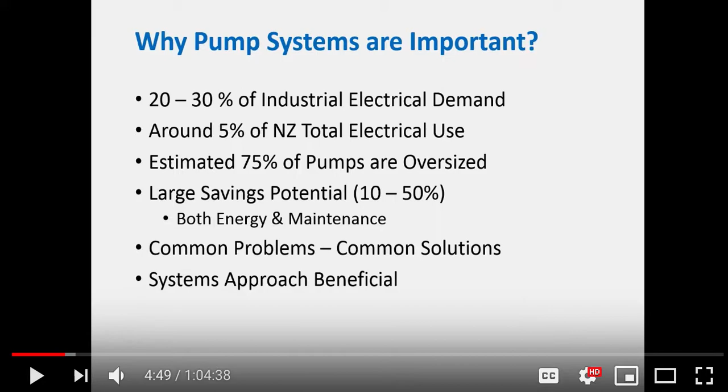To reinforce the point, this is a good study from Finland across multiple industries that evaluated 1690 pump systems across 20 sites. Average pump efficiency was less than 40%, with 10% of pumps less than 10%, and average motor efficiency was 81%. Major factors that affected pump performance included oversized pumps, throttled valves, and seal leakage, which led to the highest downtime cost.

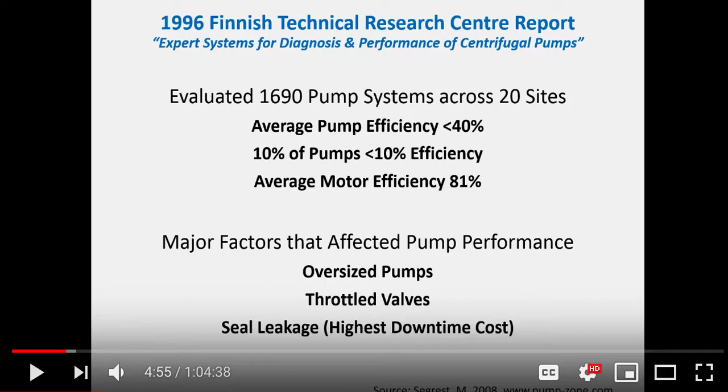Pump and system—this won't be teaching you how to suck eggs, but it's important to review what a pump curve is and the information we may find from a vendor when we look up and look for a pump. So here is a pump curve for the pump shown on the right.

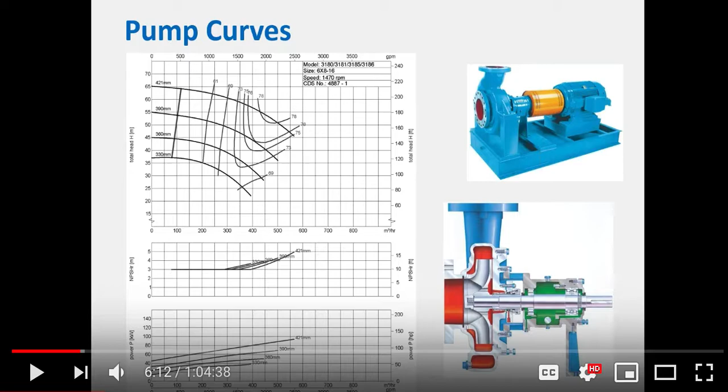If we just look at the pump curve, it basically expresses the performance of the pump—how much flow rate the pump will generate at a given head, or a given pressure drop that it has to deliver.

The four curves shown there are for four different impeller sizes. It's very common to have a casing size and then have different impeller sizes available for that casing.

Each one of those curved lines shows you the performance of each impeller size. More recently, with new pump selection packages online, you put in your requirement and it will give you a specific impeller diameter—these can be machined down, and the supplier will produce one to that given specification.

These other lines that cross our lines are lines of constant pump efficiency, and we can use those to estimate what the pump efficiency will be at a given point. Obviously there is a point on the pump curve where the efficiency is at a maximum.

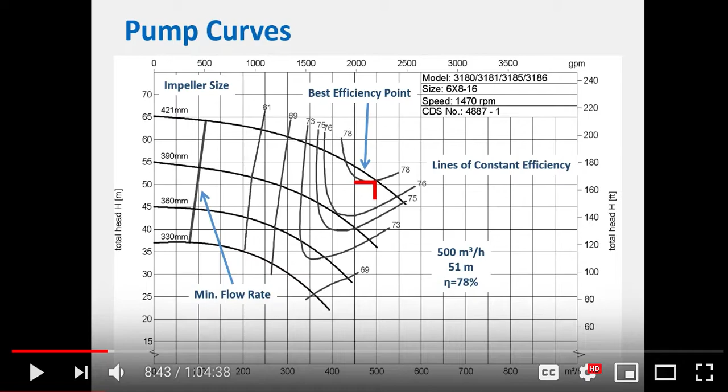If we have a given requirement, say for a certain flow rate, we can look at what head the pump will produce at that flow rate, or vice versa. So you may know what the pressure drop will be, and we're interested in what the flow rate will be at that certain point, and then we also have the pump efficiency, so we can calculate the power requirement as well.

Sometimes they're all on the one page, but I just split them up.

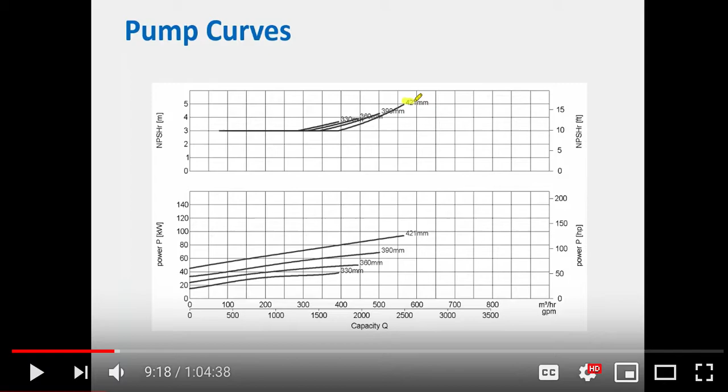There will be a net positive suction head required, some information on that given for the pump, and in this case it's done away from the pump curve proper. So here we have the NPSH required for the pump for different impeller diameters. That's important information to have, because we also need to make sure our system has a margin so that it will have more net positive suction head available than is required by the pump. Otherwise, we're going to run into cavitation issues, as well as power consumption issues at a given operating point.

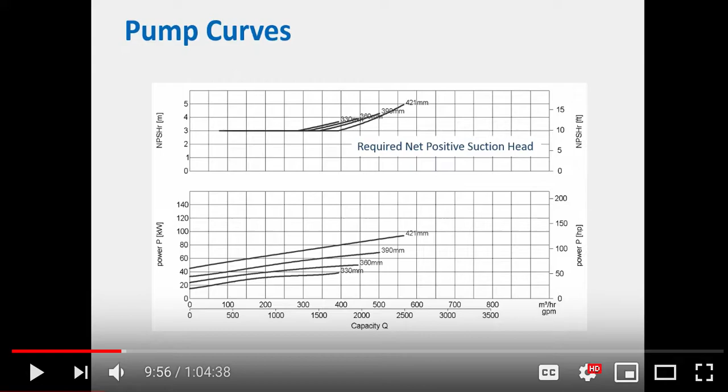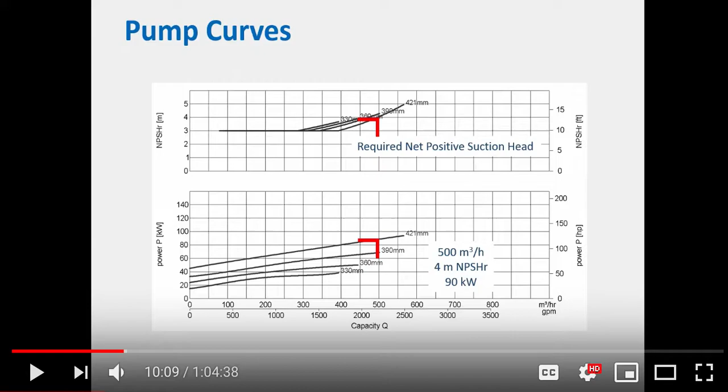So these are the net positive suction head required curves, and for a given operating point we can determine the required NPSH, as well as the power consumption of that pump at that operating point, for different impeller sizes. Or if you actually specify an impeller size and are interested in variable speed operation, for example...

It's also useful to know that if that's not provided, there are some approximations that can be made using the affinity laws.

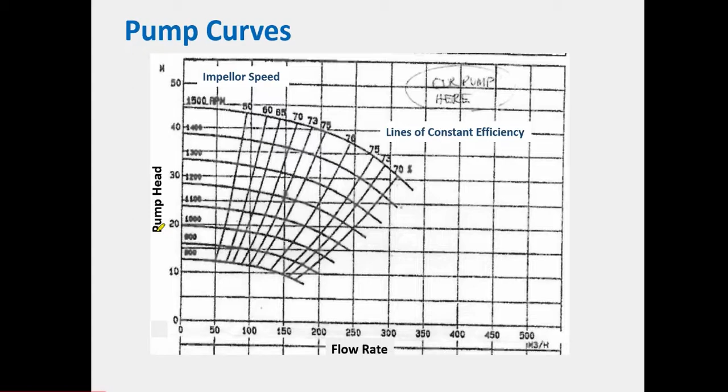Now, we talked about this in previous webinars, but it's useful to reinforce this point: ideally pumps are designed to operate within a very narrow range continuously. They can be operated outside of that preferred operating range intermittently, but there will be some energy performance and some reliability consequences.

If you're planning to operate outside of that preferred operating range for a long period of time, then it's not the right pump. The flow rate at the best efficiency point is important to know, and there's an allowable operating range outside of that, but that's really only for short-term operation, okay?

So we have talked about it.

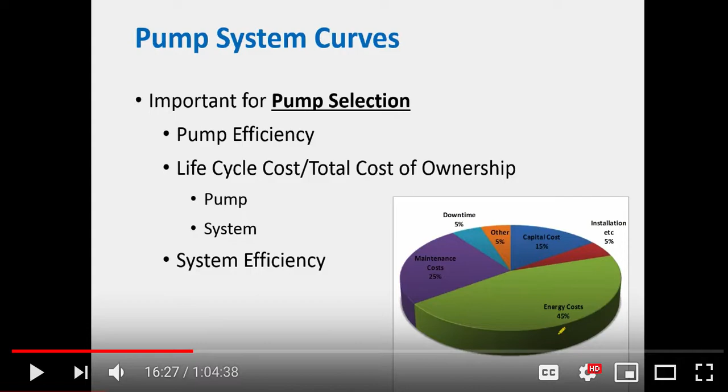There'll be entrances and exits to process equipment. There will be valves. There may be changes in pipe diameter, which will then have an effect on the pressure drop as well, so we need to understand our pump system.

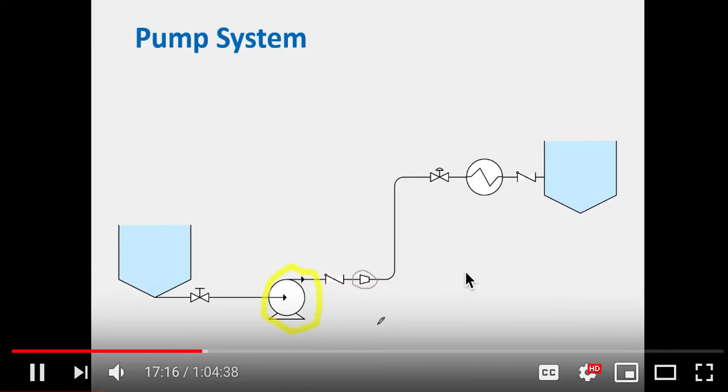And so from that we can generate our system curve, okay, and that system curve essentially describes the pressure drop as a function of flow rate for that particular system.

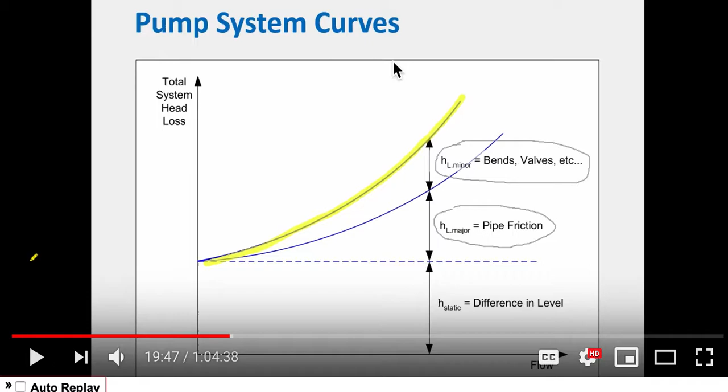If you're doing a design of a system to estimate what that will be, there's some software that can help you do this, or you can do it empirically by hand. There are some different methods, and we will in the future look in more detail at how we generate a pump system curve so we can estimate pressure loss versus flow rate, empirically.

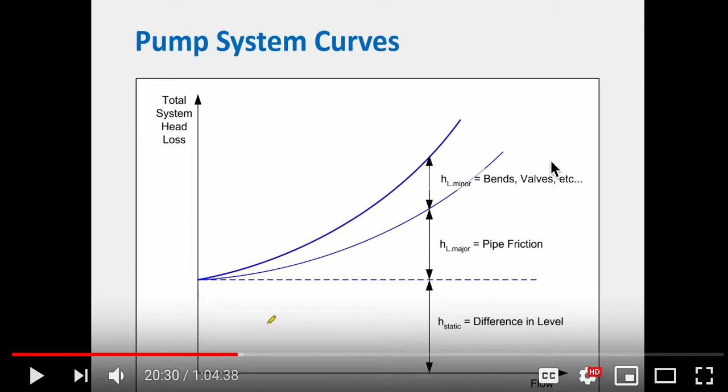Just a reminder, our operating point of our pump will always be where a pump curve and a system curve intersect. You can't get around that.

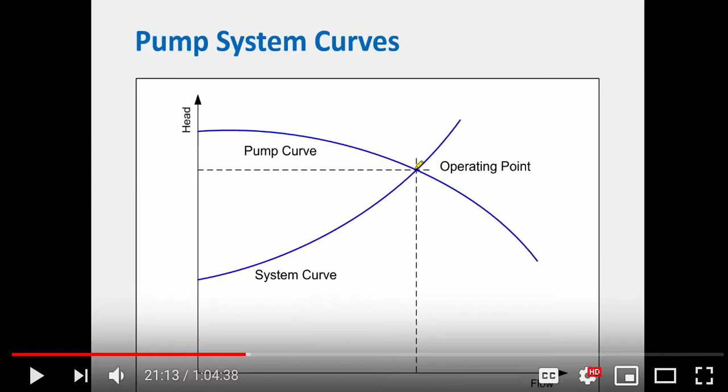With our system curve, if we want to size our pump, what we're trying to do is make the operating point at the desired flow rate or head at the best efficiency point of the pump. If there are any changes in our system, we want to be able to look at that in our pump curve. So we'll spend a few minutes talking about what we need to specify in order to select a suitable pump, and then to size it correctly.

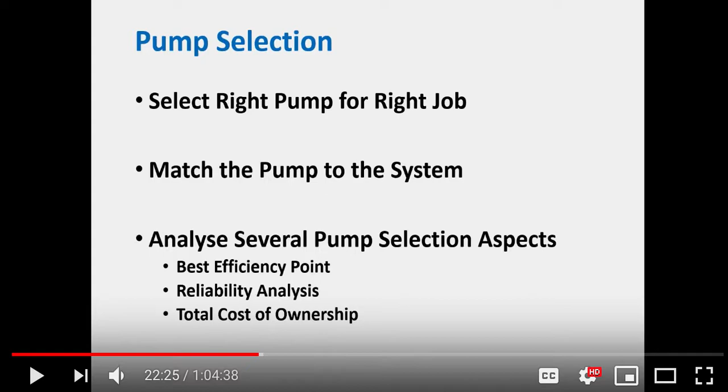Match the pump to the system, analyze several pump selections, best efficiency point, total cost of ownership, reliability analysis. System performance requirement, hydraulic requirement, pump characteristic.

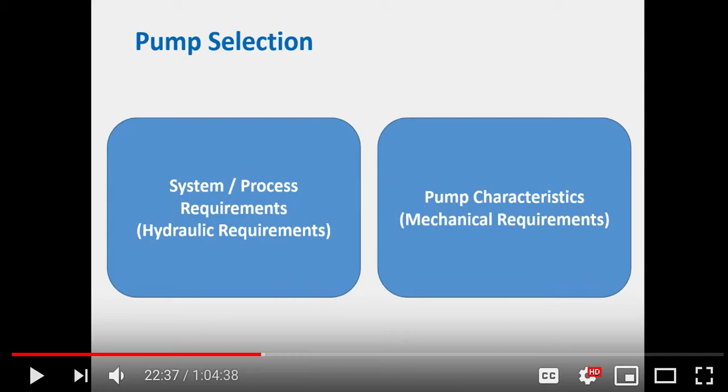Pump selection hydraulic aspects: system flow rate, static head, total dynamic head, net positive suction head, suction pressure, minimum flow rate, total working pressure, service hours, control method, liquid temperature, vapor pressure, viscosity, solid size, content, density, and other characteristics.

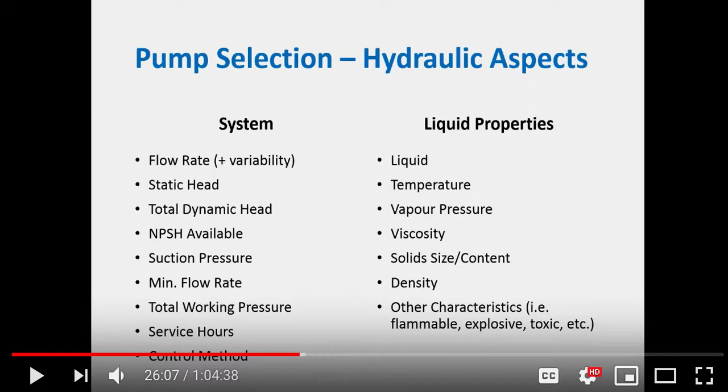A lot of our motors operate at around 1500 RPM, but we may want to go to a higher speed pump. That's an important choice to take a look at.

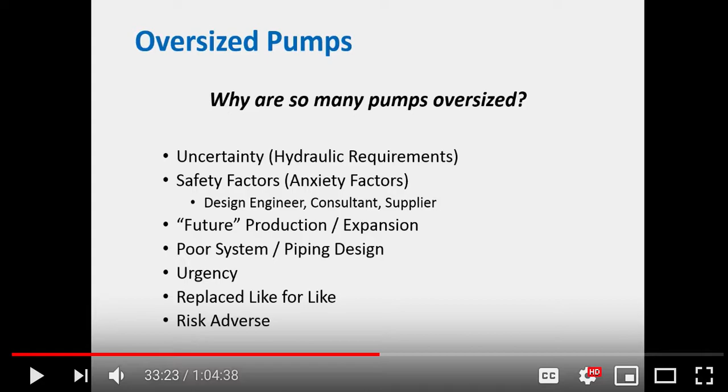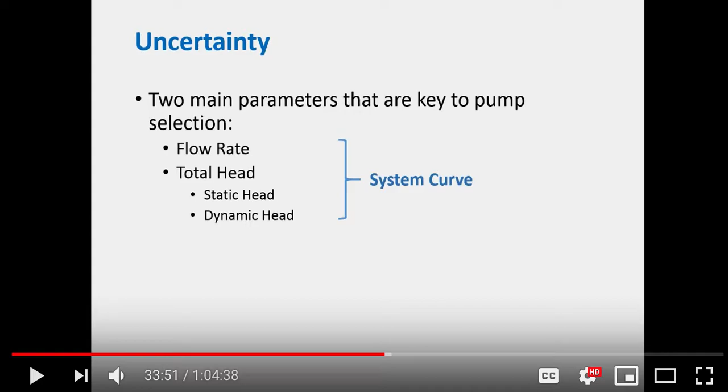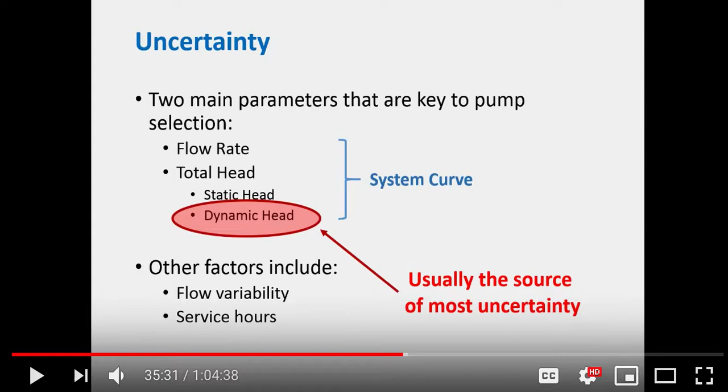Two main parameters that are key to pump selection are total head and flow rate - static head and dynamic head. Dynamic head is usually the source of most uncertainty, due to high friction bends and valves.

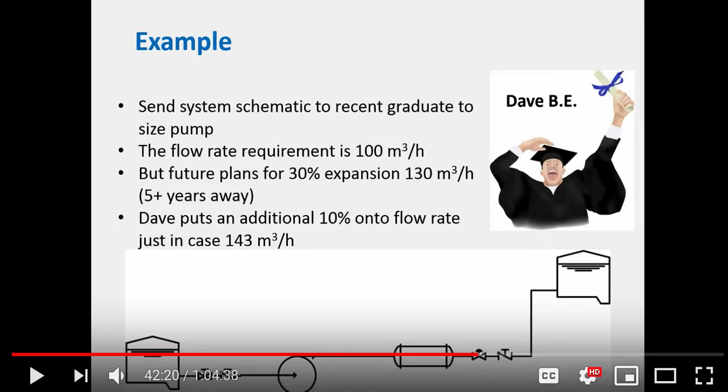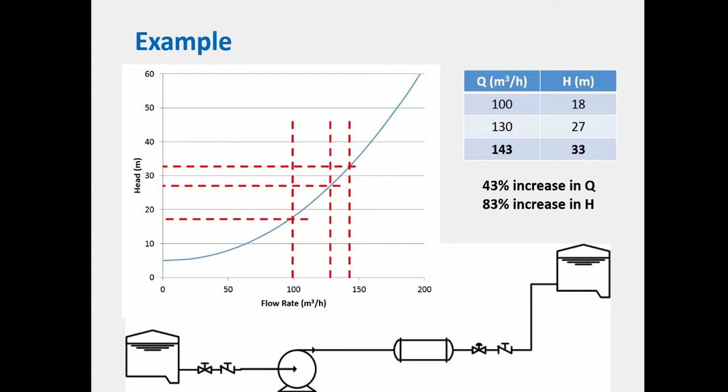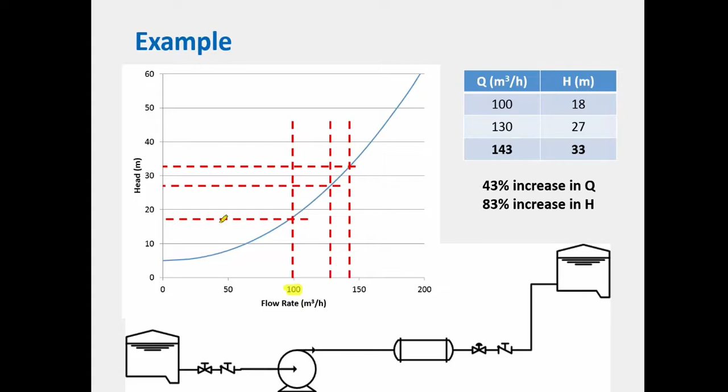So we've generated this system curve, and you'll notice we've had three different flow rates here. We've got 100 cubes per hour, which is the desired flow rate, an expansion requirement, and then also 143 cubes per hour - we've increased our flow rate requirement. That's an important requirement.

Then we also select a pump we're aware of. If we go ahead and select a pump for the highest flow rate, then we also have to have a head rate of 33 meters of head.

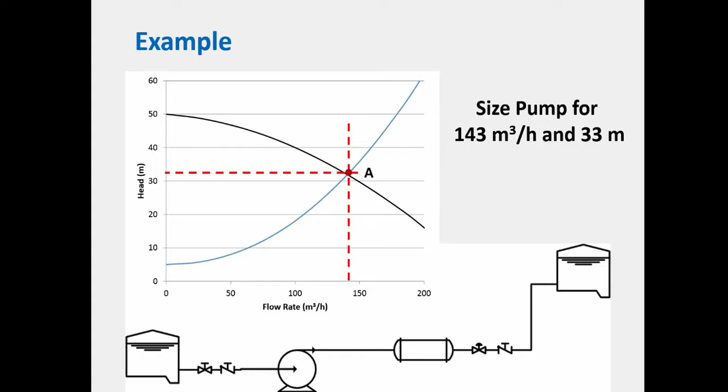So we will throttle the control valve to throttle the pump, and so we will achieve the system curve. If we select this pump and the requirement is actually 100, then we will throttle the control valve, and because we're using a control valve in this case, we're altering the system curve by providing more pressure drop to reduce our flow rate. So the pump will actually operate at 100 cubes per hour, and the total head delivered by the pump will be 40 meters. If we compare point A and point B, where we will actually operate is at point B.

Our head requirement, the head delivered by the pump, will be 40 meters. Because we move away from our best efficiency point, efficiency is going to drop - it may drop from say 80% at point A to 70%. This altering of the system means the pressure drop will actually cause the operating point to shift, consuming 15.6 kilowatts.

However, if we'd sized the pump initially for the 100 cube per hour flow and the system curve that we had, then our head requirement was only 18 meters - this is point C here.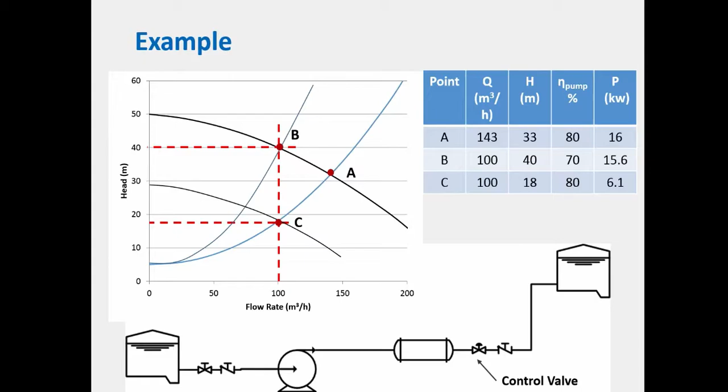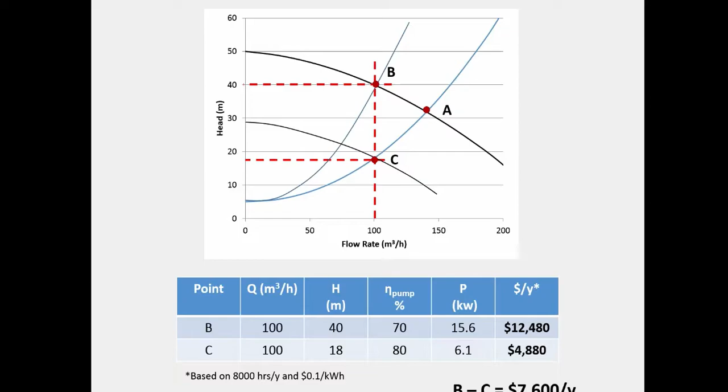The other thing to note is if we'd selected a larger pump, we're operating outside of that ideal operating range, so there would have been additional maintenance. If we follow that through in power cost, taking 8,000 hours a year and 10 cents per kilowatt hour, the total power dollars per year shows a large difference - more than double the operating cost per year just from that amount.

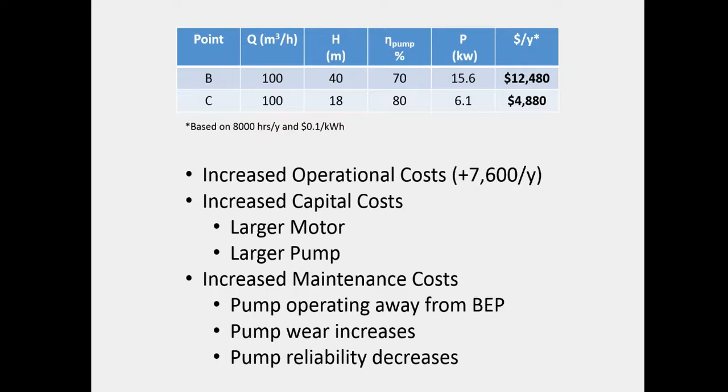Also, our motor will often be larger as well, and there'll be a capital cost implication. As I mentioned before, there'll be reliability decreases. So, the original system curve...